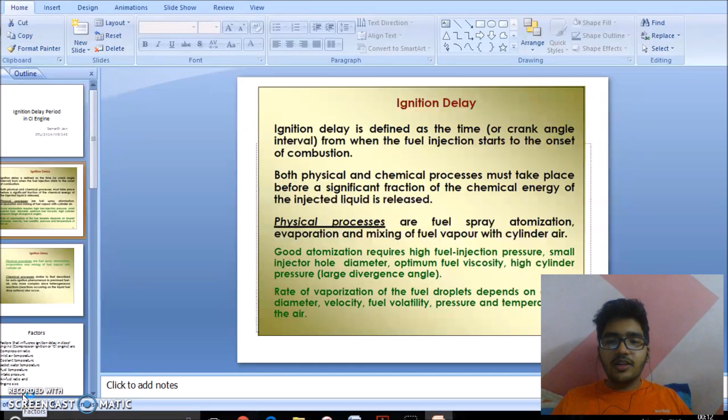Good atomization requires high fuel injection pressure, small injector hole diameter, optimum fuel viscosity, and high cylinder pressure. Rate of vaporization of fuel droplets depends on the droplet diameter, velocity, pressure, and temperature of air. Physical processes are fuel spray atomization, evaporation, and mixing of fuel vapor with cylinder air.

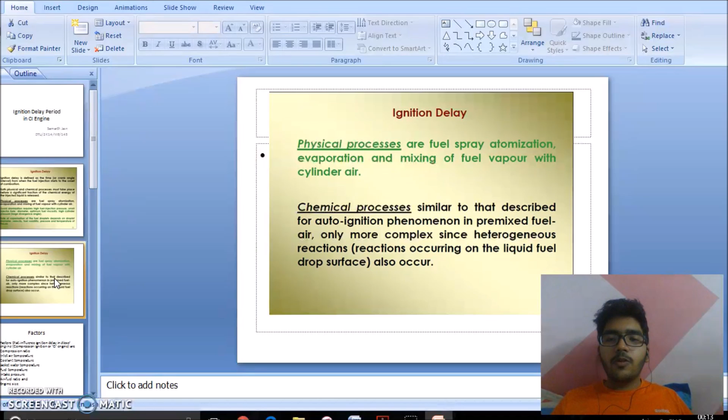Chemical processes are similar to that described for autoignition phenomena in premixed fuel air, only more complex and heterogeneous reactions also occur. Factors that influence ignition delay in diesel engine are compression ratio, inlet air temperature, coolant temperature, jacket water temperature, fuel temperature, intake pressure, air-fuel ratio, and engine size.

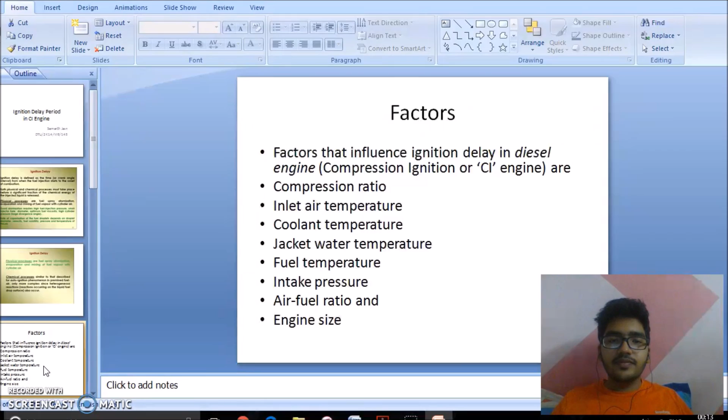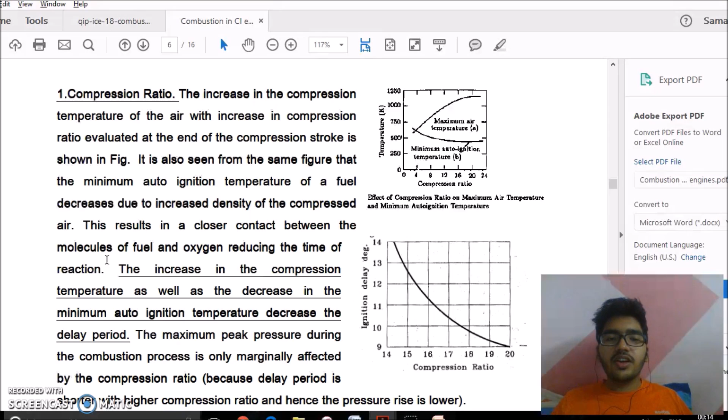Now first we will look at compression ratio. The increase in the compression temperature of the air with increase in compression ratio evaluated at the end of the compression stroke is shown in this figure. It is also shown in the same figure that the minimum auto ignition temperature of fuel decreases due to the increased density of the compressed air. This results in a closer contact between the molecules of fuel and oxygen, reducing the time of reaction. The increase in the compression temperature as well as the decrease in the minimum auto ignition temperature decreases the delay period.

The question arises: why do we not use very high compression ratio in CI engines? One of the practical disadvantages of using a very high compression ratio is that the mechanical efficiency tends to decrease due to the increase in weight of the reciprocating parts.

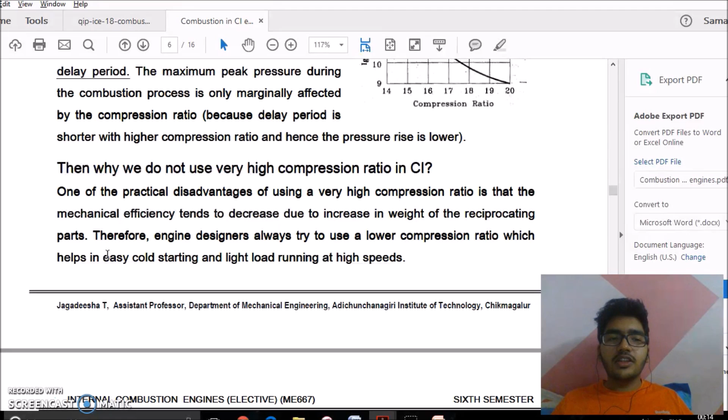The second is engine speed. The delay period could be given either in terms of absolute time in milliseconds or in terms of crank angles. With increase in engine speed, the loss of heat during compression decreases, resulting in rise of both temperature and pressure of the compressed air, thus reducing the delay period in milliseconds. However, in degrees of crank travel, the delay period increases as the engine operates at higher RPM.

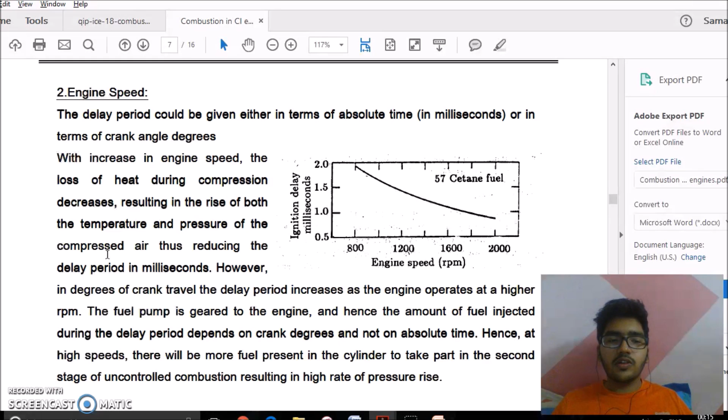The fuel pump is geared to the engine and hence the amount of fuel injected during the delay period depends on the crank degrees and not on the absolute time. Hence, at high speeds there will be more fuel present in the cylinder to take part in the second stage of uncontrolled combustion, resulting in high rate of pressure rise.

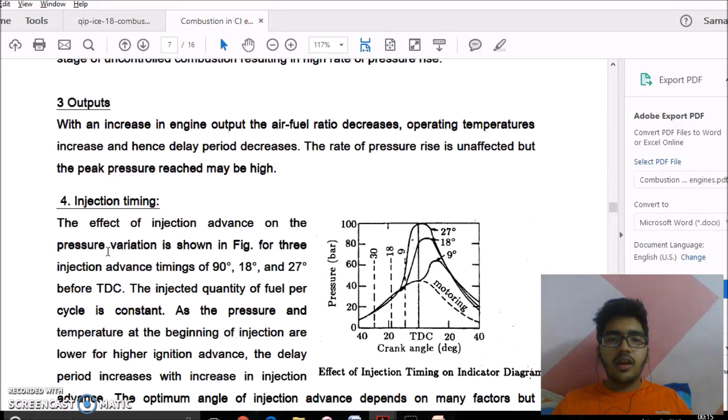Output. With an increase in engine output, the air-fuel ratio decreases. Operating temperatures increase and hence delay period decreases. The rate of pressure rise is unaffected, but the peak pressure reached may be high.

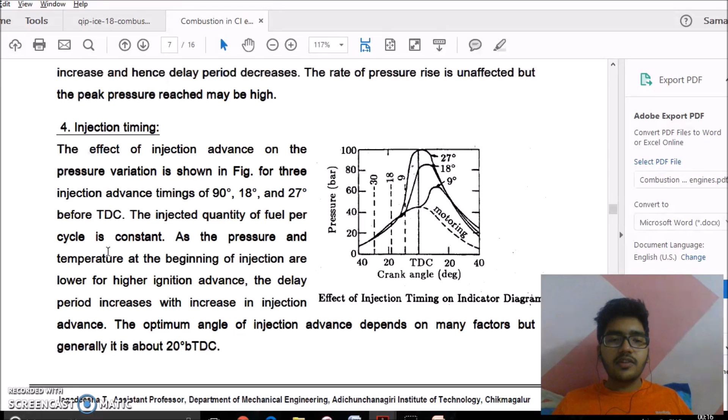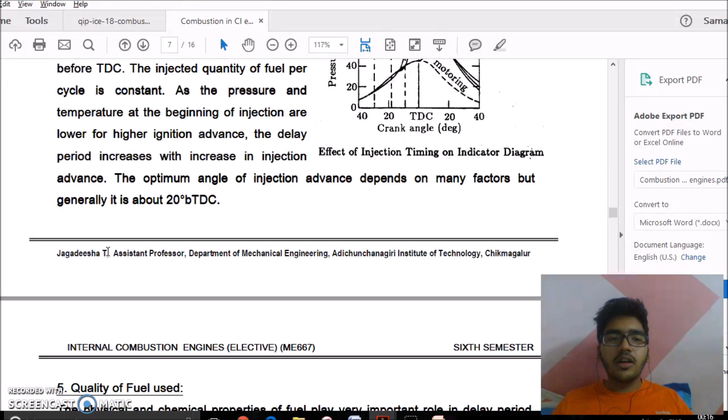Injection timing. The effect of injection advance on the pressure variation is shown in this figure. The injected quantity of fuel per cycle is constant. As the pressure and temperature at the beginning of the injection are lower for higher injection advance, the delay period increases with increase in injection advance. The optimum angle for injection advance depends on many factors, but generally it is taken to be 20° BTDC.

Quality of fuel used. The physical and chemical properties of fuel play a very important role in the delay period. The most important property of fuel which is responsible for chemical delay is the self-ignition temperature. Lower the self-ignition temperature, lower is the delay period.

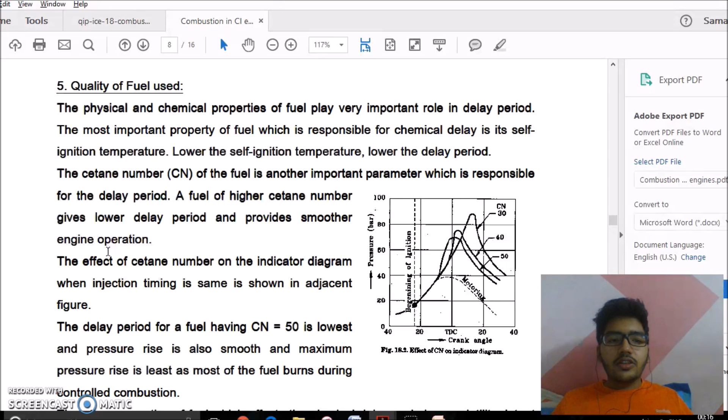The effect of cetane number on the indicator diagram when the injection timing is same is shown in this adjacent figure. The delay period for a fuel having CN equal to 50 is lowest and pressure rise is also almost smooth. Maximum pressure rise is least as most of the fuel burns during the controlled combustion.

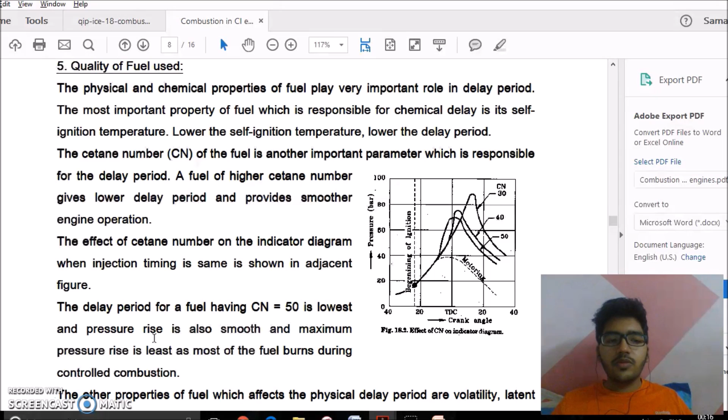Intake temperature. The delay period is reduced with increased temperature. However, preheating of charge for this purpose is not desirable because it reduces the density of charge, volumetric efficiency and power output.